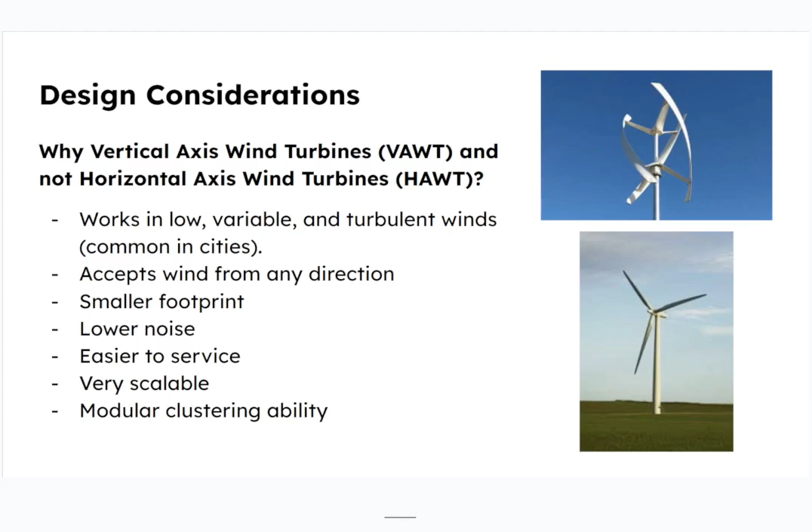We're also designing with sustainability in mind. Because the wind turbine is small, modular, and easy to produce, it can scale from a single rooftop to an array of many turbines. Using recycled materials lowers the environmental impact, and the low noise makes vertical axis turbines suitable for community-centered deployment.

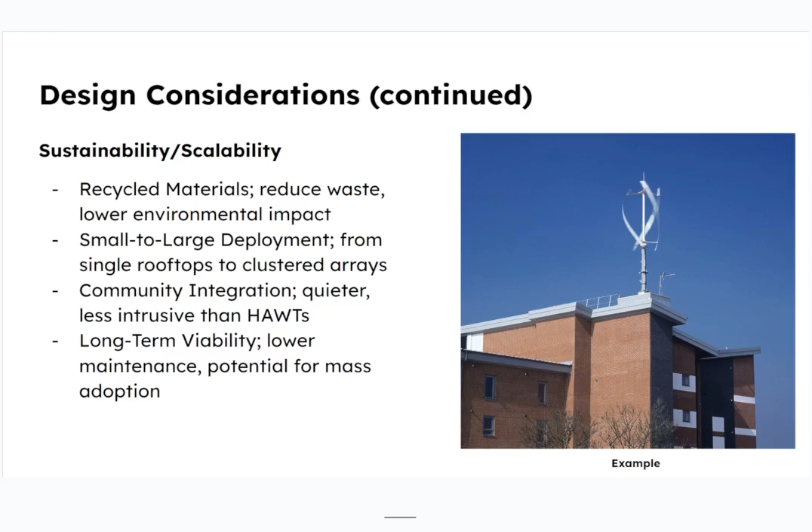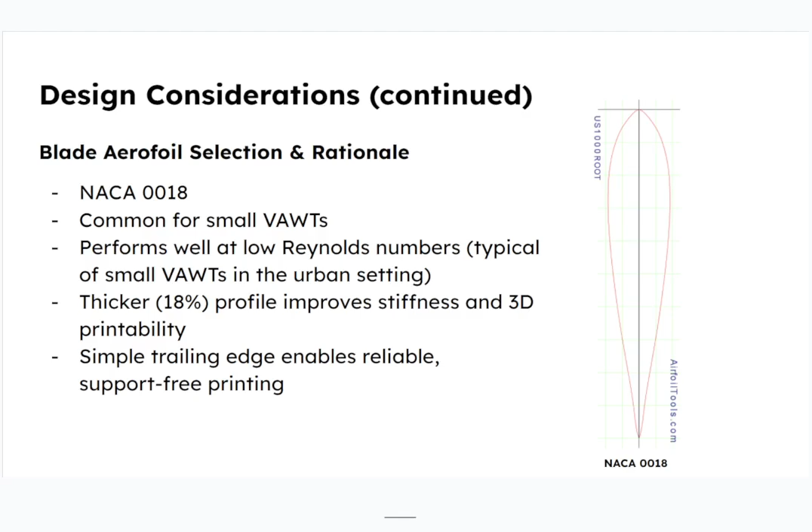To optimize lift and stability, we selected the NACA 0018 airfoil, and according to our research, this airfoil performs well at low Reynolds numbers, which matches the conditions of a small vertical axis turbine. Its thicker 18% profile increases stiffness and makes 3D printing easier and more reliable. Because it's symmetrical, it maintains good performance across the wide range of attack angles that a vertical axis blade experiences during rotation.

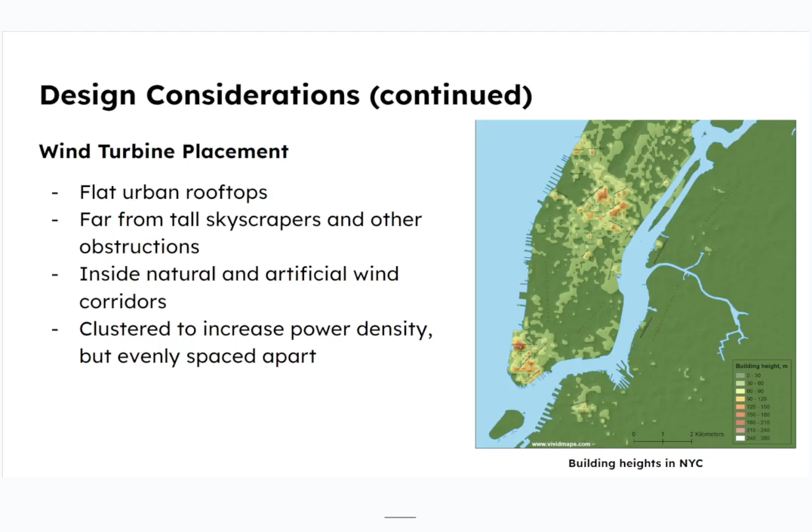Our siting criteria include flat urban rooftops, areas far from tall obstructions, and locations inside natural or artificial wind corridors created by buildings. We'll also consider clustering turbines to increase overall power density while keeping them evenly spaced to avoid wake interference.

This map visualizes how building heights influence wind flow. Tall buildings create large wake zones that reduce wind speeds for anything behind them. Our goal is to place turbines where rooftops rise above surrounding structures and provide clean wind exposure.

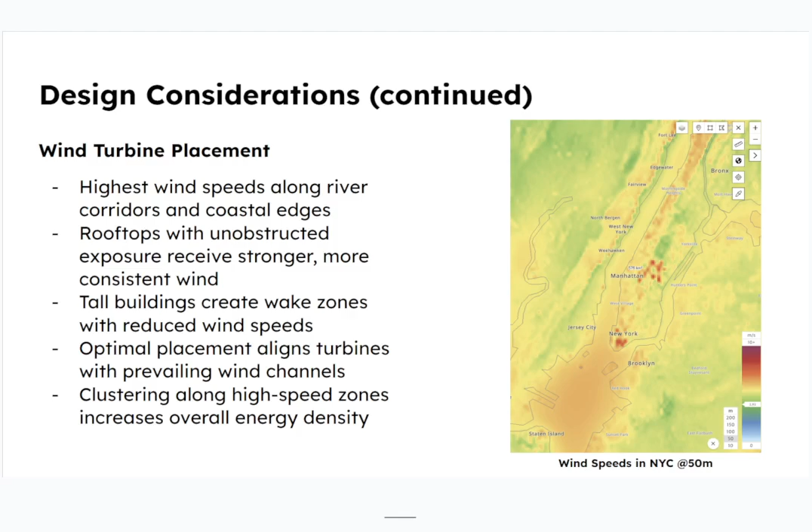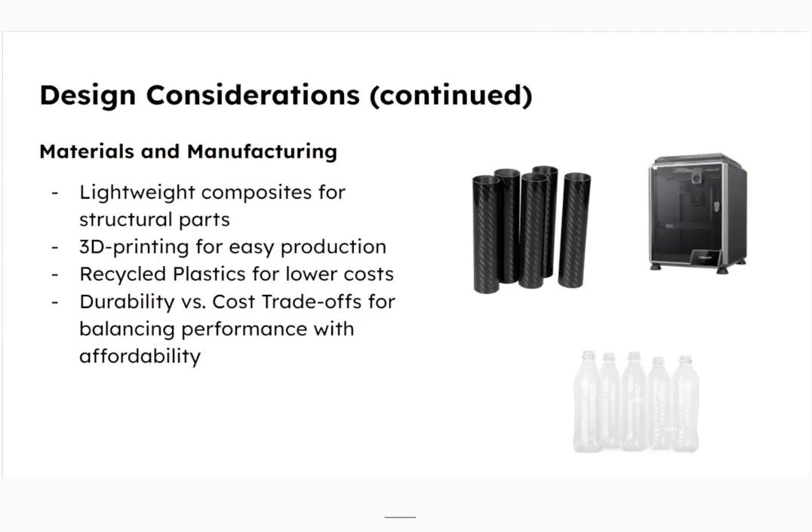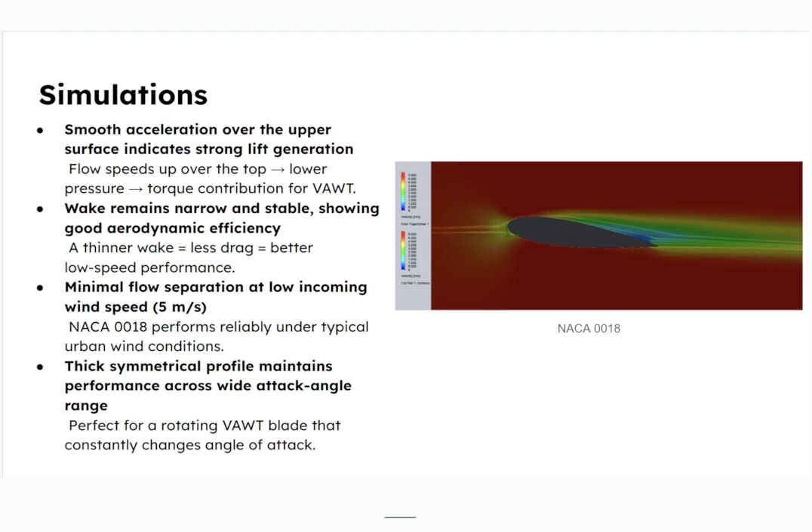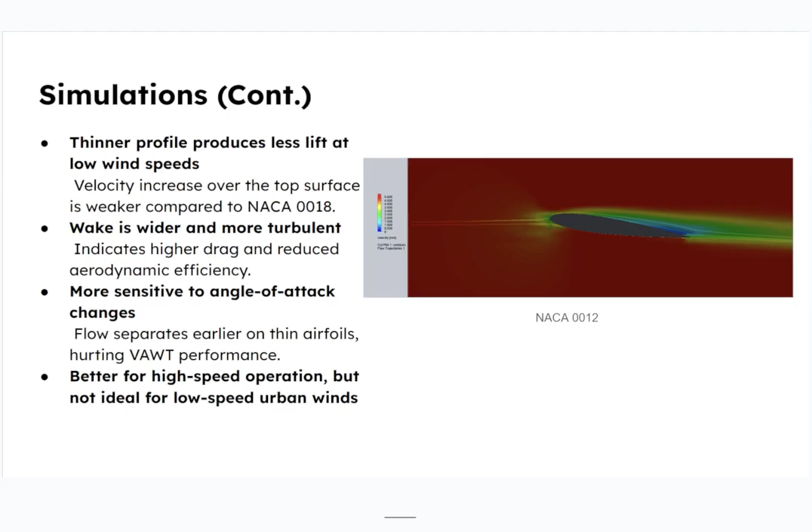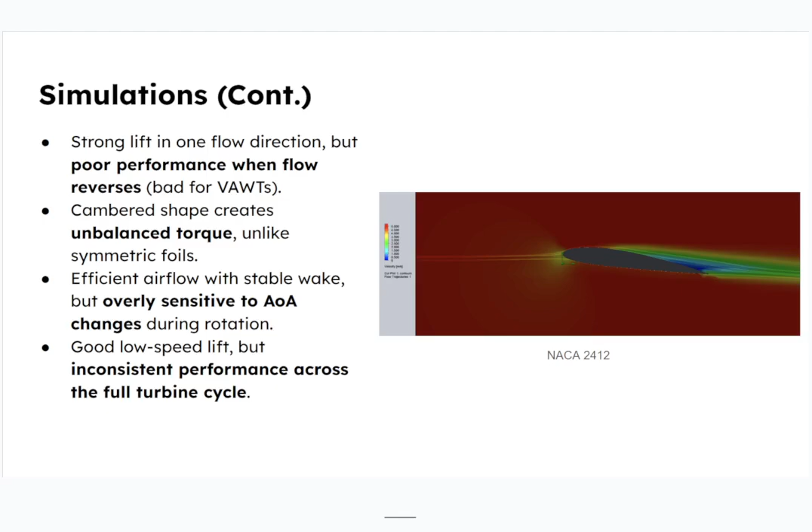And this is the last profile we tested, the NACA 2412 profile. It's cambered, so it produces strong one-directional lift, but it becomes unbalanced in reverse flow. Because a vertical axis wind turbine blade constantly reverses its relative angle of attack, this will create uneven torque and reduce efficiency. This confirmed that symmetrical airfoils are essential for urban wind turbine design.

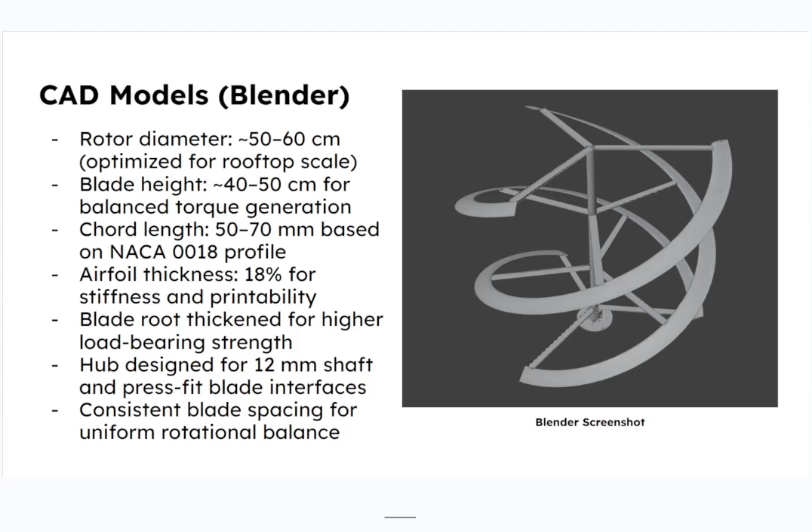For our CAD model, we decided to go with a rotor diameter of roughly 50 to 60 centimeters with blade heights around 40 to 50 centimeters. We designed the blades using the NACA 0018 profile with a thickness optimized for printability. The hub fits a 12 millimeter shaft and creates uniform spacing to ensure smooth rotation and minimal vibration.

So in our study, key findings are that the simulations showed the NACA 0018 profile delivered the best mix of stability, lift, and low speed performance. Its symmetrical, thicker profile generated more consistent torque throughout rotation, and the added thickness also improves 3D printability and structural strength, making it more reliable for prototyping.

The wind map analysis confirmed that placement matters just as much as blade design, with river corridors, coastal edges, and open rooftops providing the strongest winds. Overall, the results support a practical and scalable wind turbine design suited for real-world urban environments.